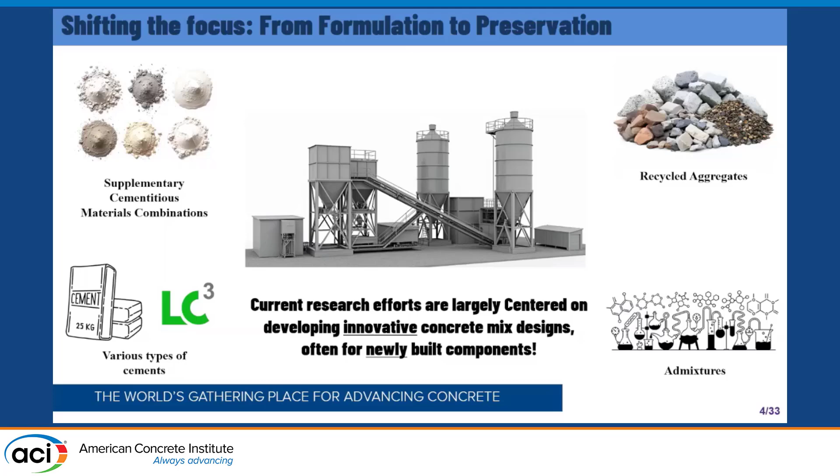So when the structure is very important, too expensive, or too embedded, as we can see, most of the buildings and most of the bridges were built in the 1960s, 1970s with a service life of 50 or 75 years. So we are basically nearing the end of these important structures.

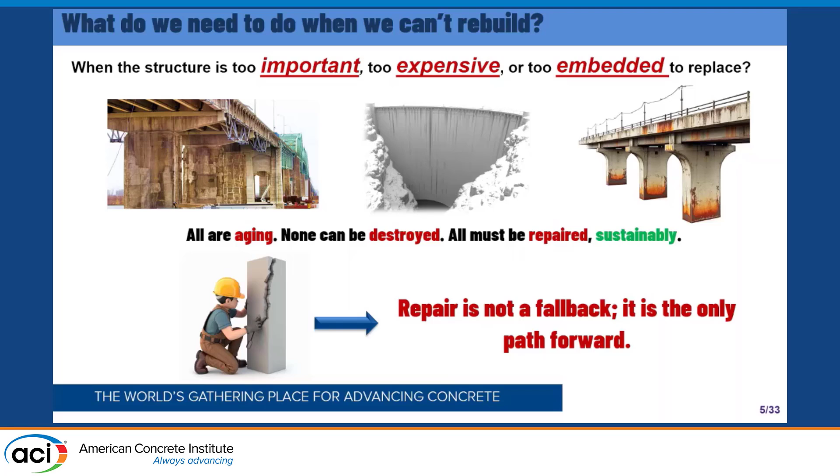So all of them are aging, and none can be destroyed, and all must be repaired sustainably. I think that everybody is talking about sustainability, but we are talking about it from a formulation point of view. How about repair?

So we will move to the problem statement. So none of us can deny that the situation of our infrastructure is getting worse and worse, whether buildings, bridges, dams, or any other civil engineering structures.

In a report published in 2017 by ASCE, they said that the condition of their bridges is marked as C+ on a scale from A to F, where A corresponds to the excellent condition, and F corresponds to the lowest case scenario. So more than 185,000 bridges are in need of urgent consideration.

Over 46,000 of them are nearing the end of their service life. So the budget for retrofitting was set at that time in 2017 to be $123 billion.

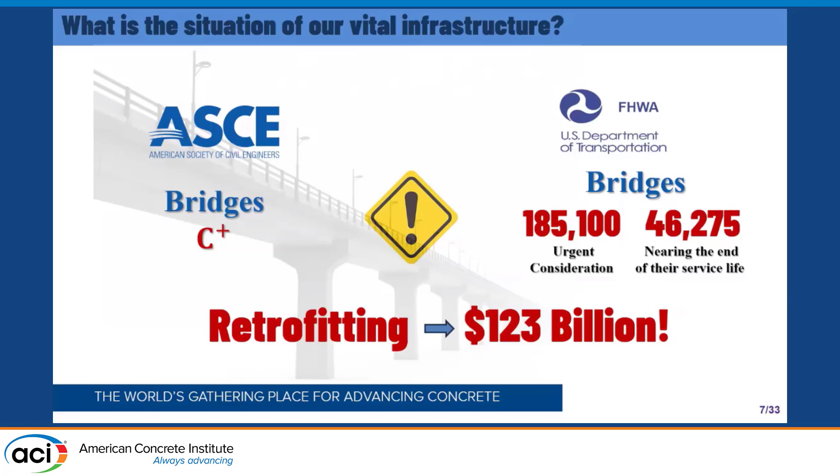So you can imagine what's going to be the number in 2025 with climate change and a lot of issues and temperature variations, and concrete depends on the environment.

I'm here comparing between two different scenarios for a new building and a retrofit. So the quantities here assume a 10,000 meter square building with a lifetime of 20 years, and as you can see, we can easily save 600 kilograms of CO2 equivalent per meter squared through reuse.

And the red color basically talks about the embodied carbon, and it's mostly due to concrete.

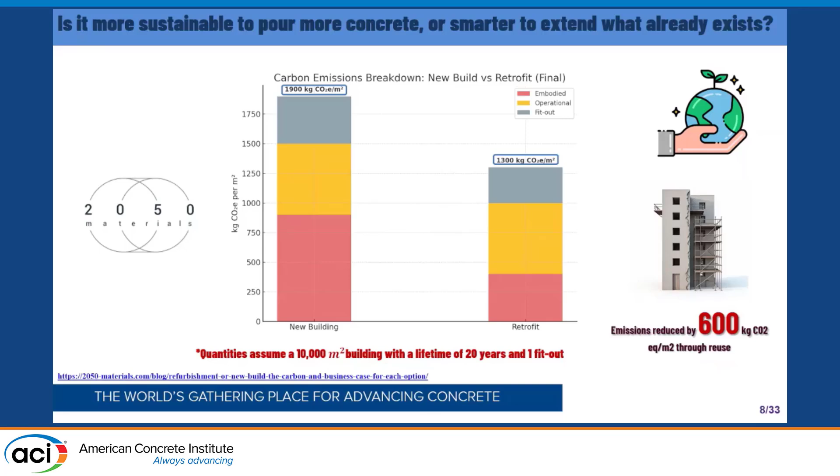So let's talk about the inspection protocols. Usually, we send our inspectors to the site to look at the damage, look at the cracks, and subjectively try to determine what's happening in the crack.

Is it safe? Is it within the limits? Is it less than 0.3 millimeter, as we have in the Ontario inspection manual, for example? So this kind of inspection is very dangerous, time-consuming, repetitive, and subjective.

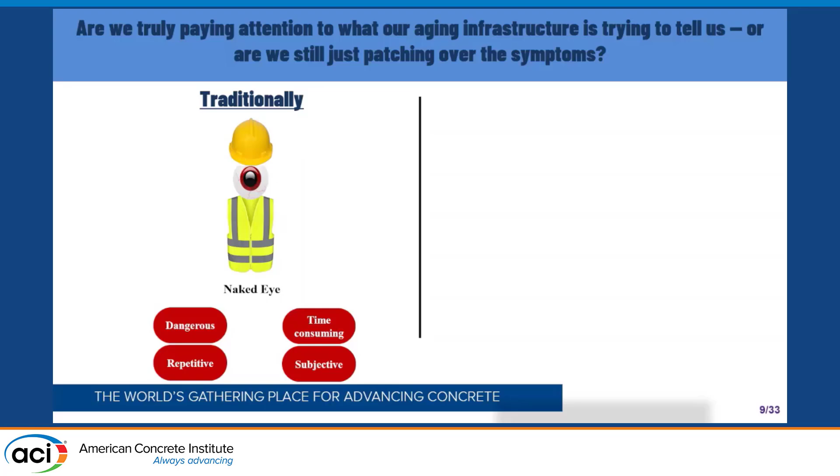So the question now, how can we repair this sustainably? Thanks to the advances of sensors and drones and all the IoT things and machine learning and all that, we now have the accessibility to use drones.

They are time efficient, data-driven, performance-based, and cost-saving. Now, how can we use that?

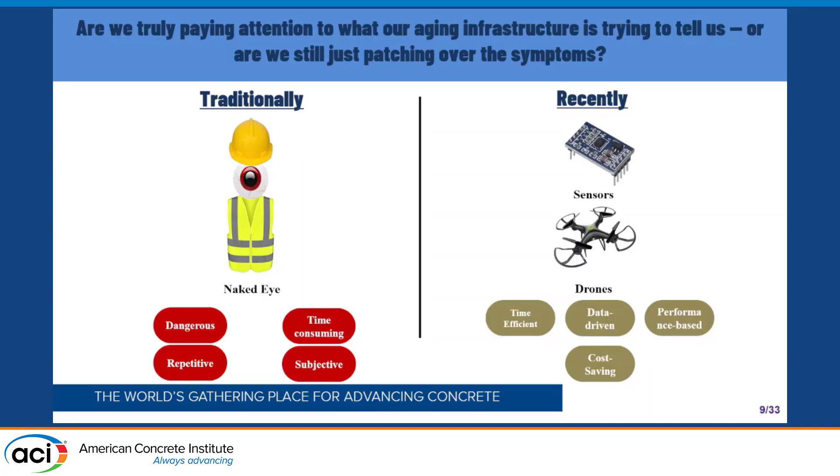So computer vision has a set of successful records dealing with other applications, like, for example, autonomous vehicles, health applications, facial recognition. So this drone is going to take a big database of images, and then instead of feeding that to our most highly skilled inspector, we're going to give it to the deep learning algorithm now.

And this can be done in a matter of seconds, instead of spending days and months doing such a repetitive task.

Let's talk about the methodology. So first of all, given the success of the deep learning framework, I want to develop that for crack detection, for civil engineering applications. Second, do we need to stop at classification?

Or can we go for further applications like detecting the cause of the crack? Is it shear, flexural, combined, or durability related? Like, for example, corrosion, bond damage, and other kinds of applications.

And finally, I don't want to stop here. I also want to quantify the crack in terms of the length, width, and the angle of orientation, and that's going to serve us to determine the cause of the crack.

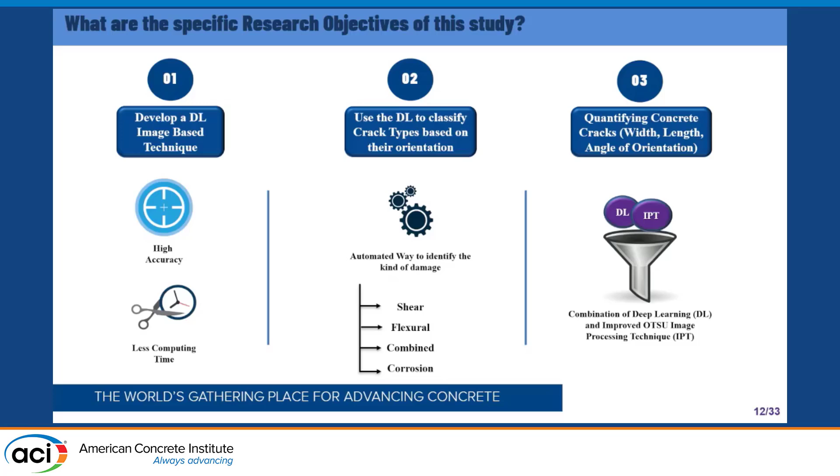So first of all, I got the data that's publicly available by Middle East Technical University in Turkey. They took 458 images with high resolutions, and then I had to crop them to 227 by 227 in terms of the number of pixels on the x-axis and the y-axis.

20,000 of this data basically contains cracks, and the other doesn't have any crack in it. So the surface is intact, and there's no problem in terms of durability or structural deterioration.

Now I want to pre-process the data. First of all, I'm going to clean any kind of distortions, blurriness, low resolution, and if the data contains any of that, I'm going to remove it.

Finally, I'm going to be left with 10,000 images, 5,000 for cracked and 5,000 for not cracked, and then I'm going to perform all the operations to get the best quality of images to train my deep learning algorithm on.

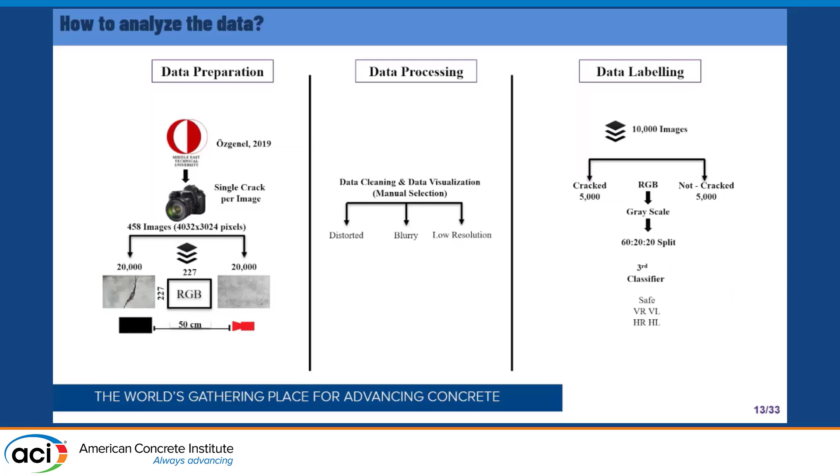So I have 3 different classifiers. The first classifier will just predict if it contains a crack or not, and then 2 other classifiers will predict the orientation of the crack.

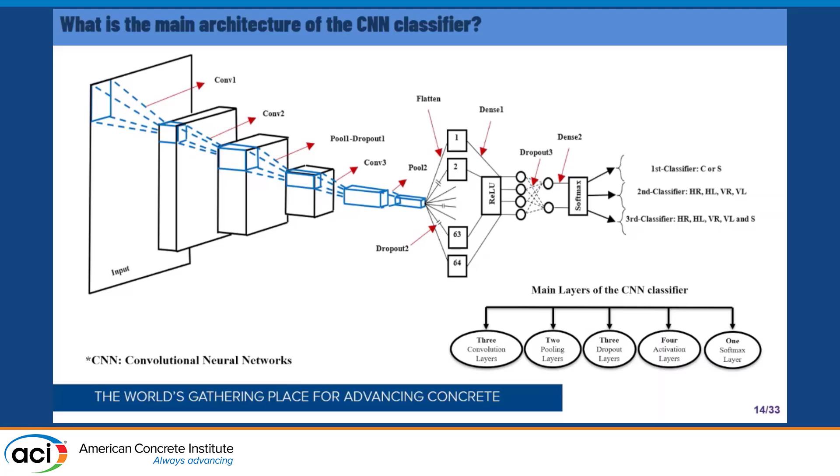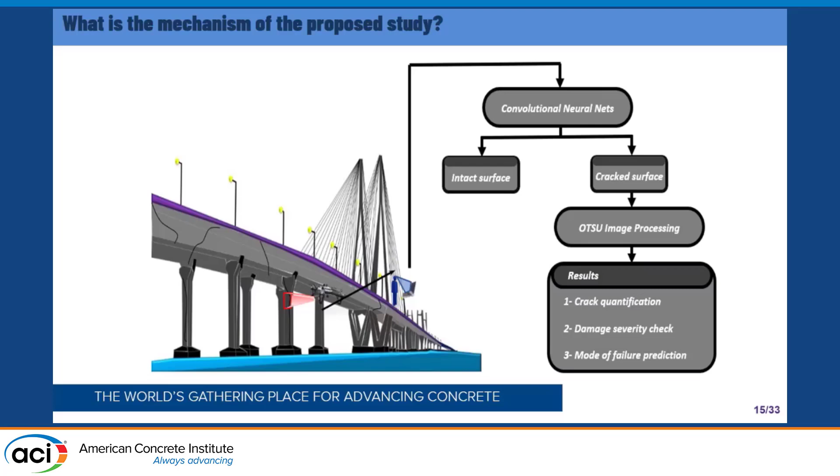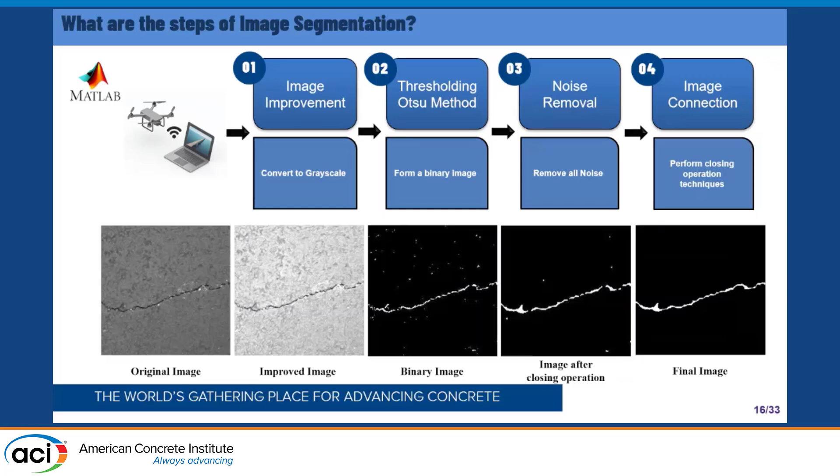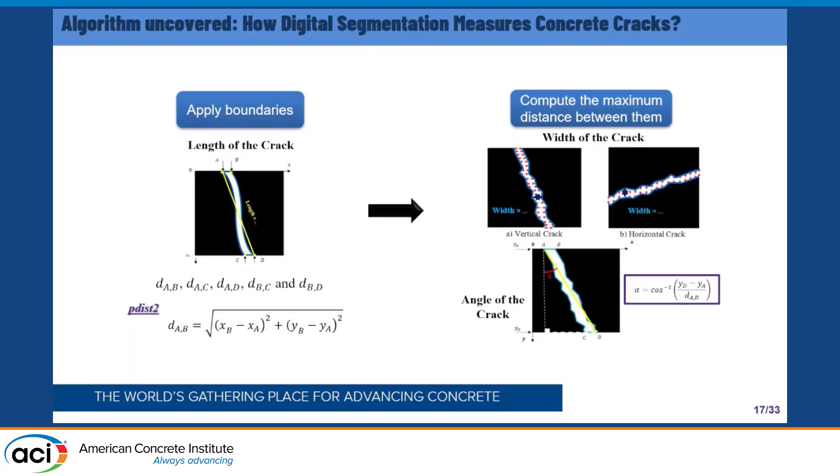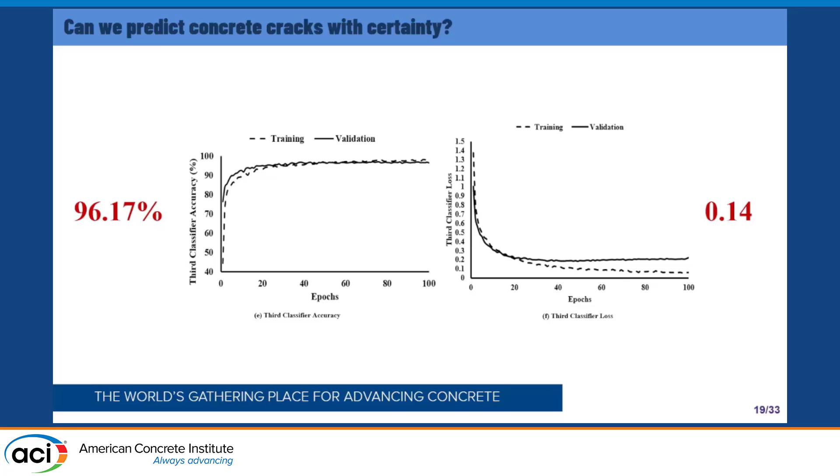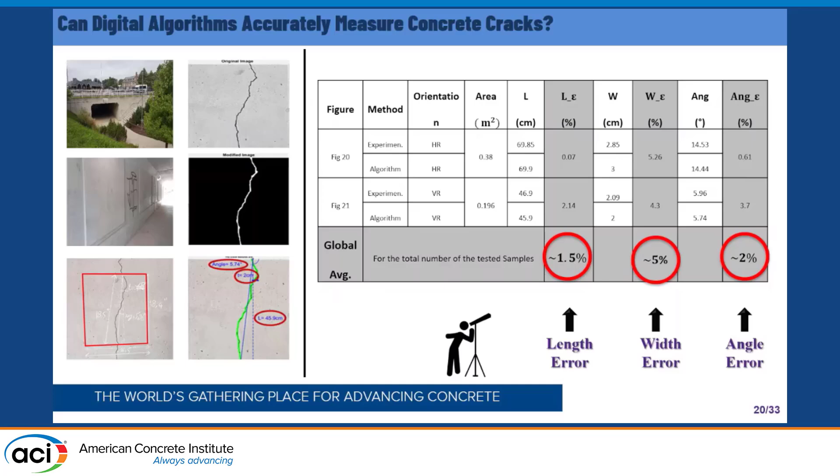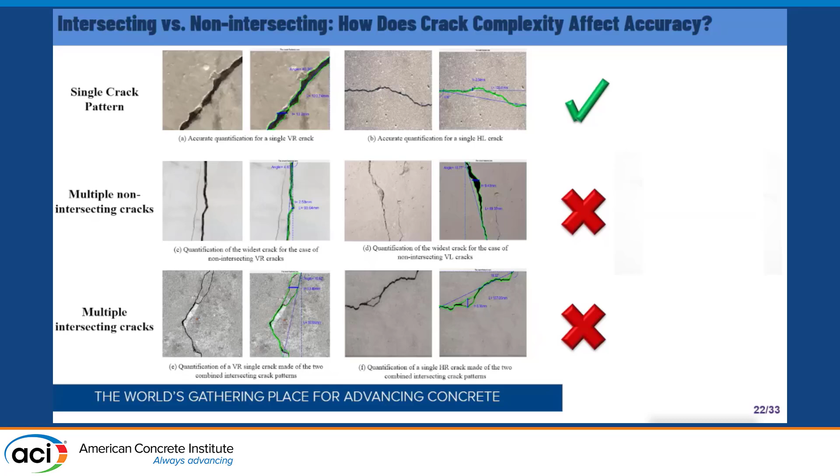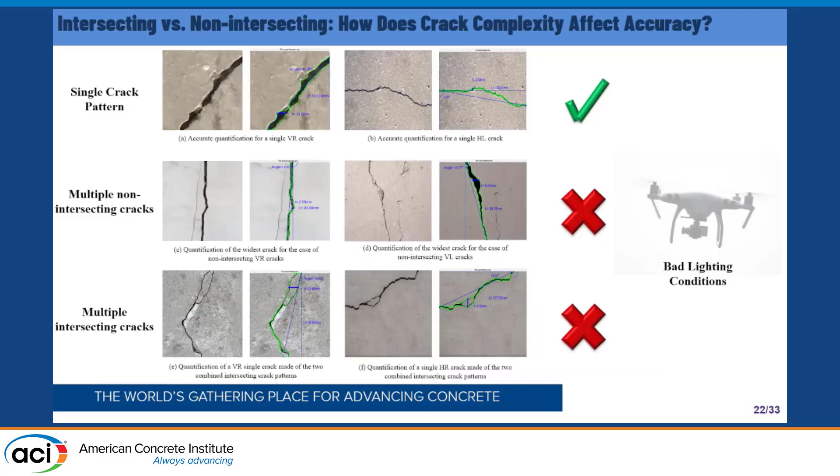And, of course, since we are sending a drone for structures that are hampered by demanding access, we have to be careful about the lighting conditions. If it's a foggy day, for example, then we cannot really send our drone to do any inspection. It has to be within perfect lighting conditions.

So what is the novelty and contributions of this work? First of all, we demonstrated that a precise quantification of cracks is essential for effective structural health monitoring. We provided a new configuration of the deep learning architecture, and then we provided at the end a nearly automated inspection platform. We don't want to say automated because we still have a lot of back and forth discussions between the inspector and the operator of this algorithm.

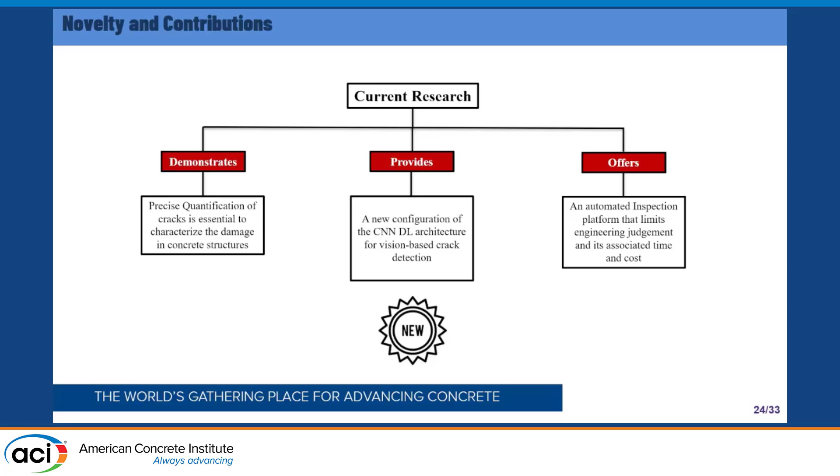So for example, in this case, you can see we have a frame, and we are trying to guide the algorithm. If you see at crack A, these two cracks are basically more or less related to durability. It is more of a chloride attack or a bond damage. Same thing for B. But if we look at D, C, or F, these cracks are mostly structural. They depend on the orientation, and that's why we're going to use that orientation of the crack to quantify, at the end, the reason or the creation cause for the algorithm.

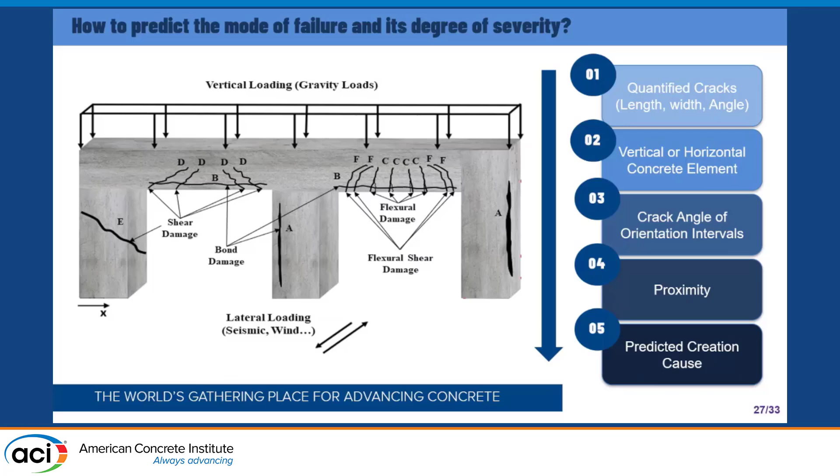Cracks don't happen only because of structural limitations. If we have a structural problem, then that's a big problem, but they're mainly related to durability.

So we need to have information about where exactly we are inspecting the structure. If we are inspecting it, for example, within northern Canada, where we have a lot of freeze and thaw cycles, or we are inspecting it in Toronto or Montreal with a central region or high CO2 atmospheric problems, a lot of temperature variations—it depends on the area exactly where we are conducting the inspection.

So this is what we call performance-based repair. Instead of going for general repairs that can go everywhere, if we want to really go for sustainability, I think this is the solution.

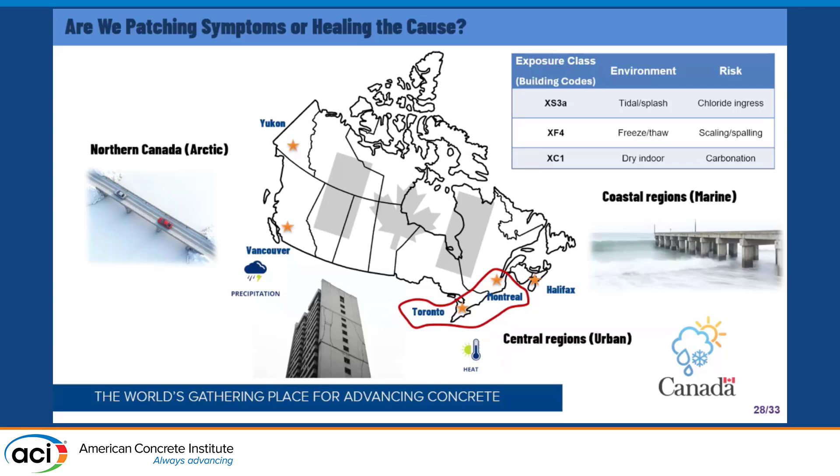So here we are narrowing down the reasons of creation of cracks, why exactly the cracks are happening. So given the information about the failure type and the exposure risk, depending on the durability and the location exactly where we are inspecting the structure, we can feed a lot of information to the model.

For example, for durability, what are the durability requirements? Do we need impermeability, or how about the frost resistance? How about the thermal compatibility of the repair we are conducting? And then for structural, do we have fatigue? Are we conducting an inspection for a bridge or a building, or depending on the load that's applied on the structure? And then same thing for serviceability, constructability, and then finally, and most importantly—this is the main part of my research—is to find alternative solutions on how we can cut CO2 emissions.

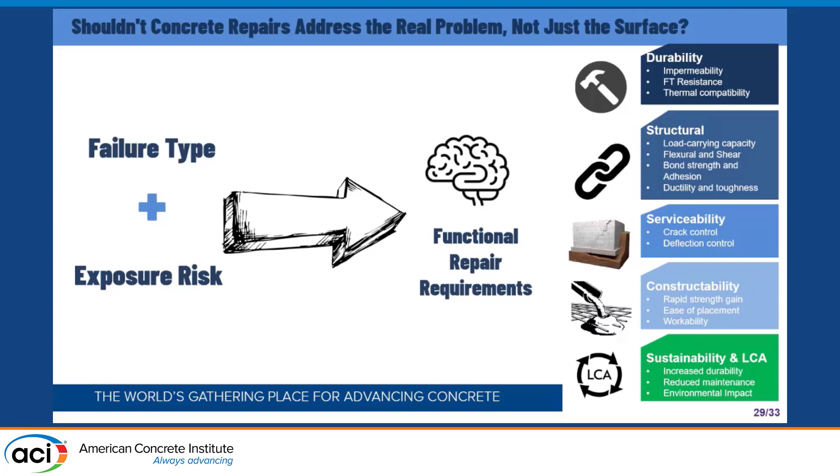So at the end, we're going to have such a form of a mixer. We're going to have a lot of different trade-offs, a lot of different objectives, and we want to provide a trade-off for what's going to be the best solution depending on the context we are in. And then we will identify optimal mix designs depending on the environment, and then at the end we're going to apply multi-criteria decision-making.

Just to give an idea, for example, we have this example here in that table. We have 3 different alternatives: slag mortar, LC3 grout, or OPC patch. We are going to look at the bond, the CO2 emissions, the life expectancy, the cost, and then we're going to provide a list of ranked solutions. And then it totally depends on the inspector to pick the best solution they think.

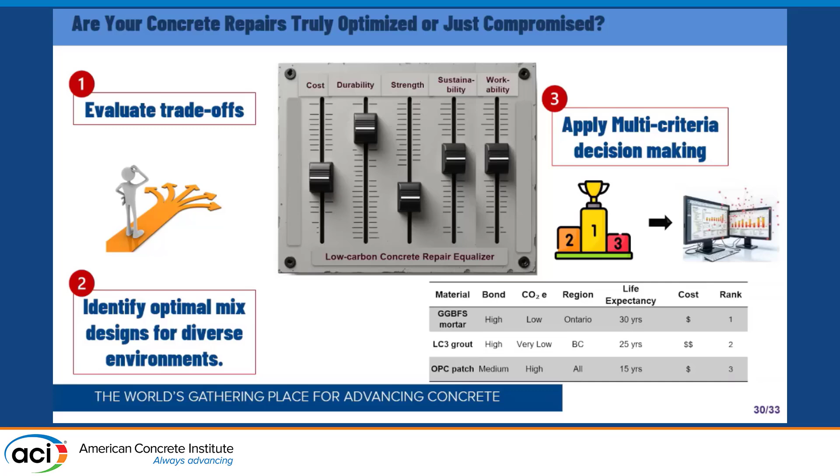So, concluding this work, we provided a deep learning model combined with image processing techniques that accurately classifies and quantifies various crack patterns and damages. We are calling to go for repair instead of just focusing on building new structures—it's time to focus on repair. And finally, we are providing AI-driven repair solutions that can offer optimized and context-sensitive recommendations, or what we call performance-based repair, instead of just generating the prescriptive type of repairs we usually provide.